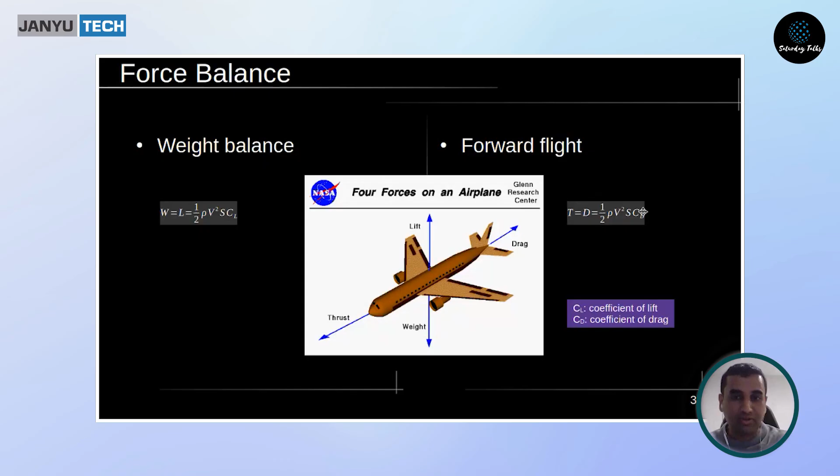Just bear in mind, CL and CD are going to make an appearance a fair bit as we go through the talk. I'm not able to change slides... No, there you go. All right.

Now that same force balance equation actually becomes a little more nuanced. I showed you an airplane flying straight and level. Now, instead of flying straight and level, if our airplane is climbing or descending, here's what happens. So I have an airplane that's climbing or descending, and this time, well, when you ask, what do you mean by climb?

Where is the airplane pointing? We have to be a little cautious. So the first thing we do is draw this reference line. Think of the fuselage as a perfect cylinder - this black reference line would be the central axis of that cylinder.

It's called the fuselage reference line, or FRL for short. The FRL is inclined to the local horizon, and the angle between the FRL and the horizon is called the pitch angle. The pitch angle is basically used to identify the component of gravity along that line, but it's irrelevant to our discussion today, so we won't worry about it.

But we'll worry about two specific terms that add up to the pitch angle. It's understandable that the airplane's velocity vector, or flight path, shown here with this black arrow, need not be perfectly aligned with the FRL. Sometimes the plane's nose can be above the velocity or sometimes below. The angle between the velocity vector and the FRL is known as the angle of attack, denoted by alpha.

And that second component, which tells you the angle at which the airplane is climbing or descending, measured by the angle between the flight path and the horizon, is denoted by gamma and called the flight path angle. Now, as a matter of notation, lift and drag are defined along and perpendicular to the velocity vector, that is, the flight path. So lift is perpendicular to the flight path and drag is, by convention, along the flight path.

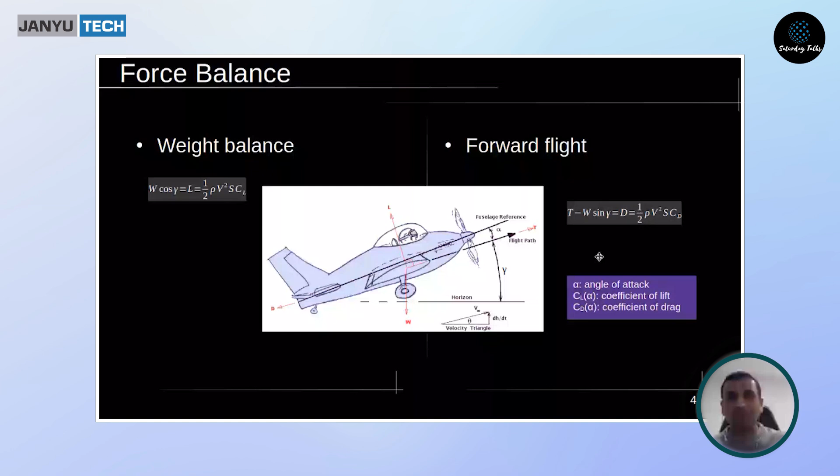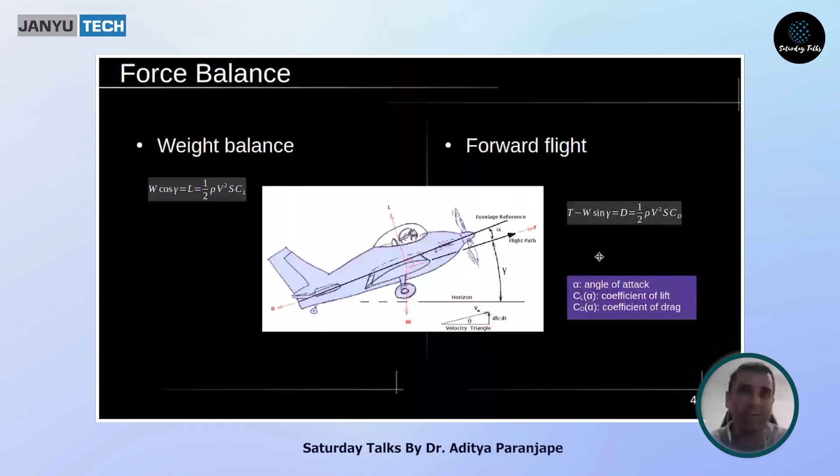Nothing else - and that's sort of obvious, because the aerodynamic forces do not depend on gravity. They really just depend on how fast the airplane is moving with respect to the ambient conditions. So whatever orientation the airplane has with respect to the oncoming wind is all that's going to dictate the forces. That intuition is captured here in these mathematical expressions.

So with that, let's understand what CL and CD, the two coefficients, look like as a function of alpha - and that's going to lead me to talk about a phenomenon known as stall. It turns out that the coefficient of lift, CL, as a function of alpha, has a very distinct bound.

If I were to plot CL versus alpha, I've shown it in green. It initially increases linearly - this reference value need not be 0, it could be some other value, depending on the precise shape of the wing. And then after a point, it flattens out. When it flattens out, you get a condition known as stall.

Now, what's happening physically is that on one side of stall, where the lift increases linearly with alpha, if you look at this picture, you'll see the flow around an airfoil - this is taken from a wind tunnel. You see the flow actually smoothly tracks the profile of the airfoil, so that flow is called attached flow.

And that attached flow is what enables this wing to produce a good deal of lift with the penalty of very little drag. To give you an idea, the ratio between lift and drag is typically as high as, for a pure wing not counting the fuselage, 30 or 40. When you add a fuselage, that ratio obviously comes down.

Now, the reason this stall happens is because the flow struggles to stay attached as this wing becomes more inclined with respect to the oncoming flow. And what you see on the right is another picture from a wind tunnel.

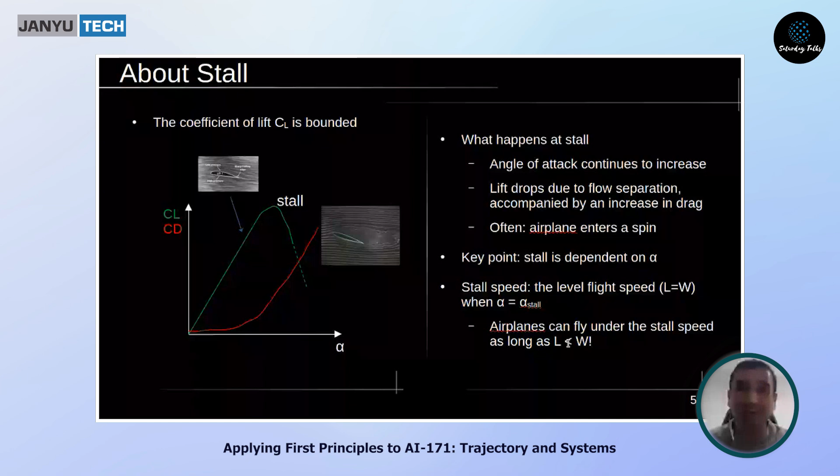The reason I brought this up here is because going back now to the Air India flight, I'll play the video for you later and show you why it was thought of as a stall. There was a feeling maybe that the airplane had stalled, and some of us on the other hand held firm saying that it's not a stall, because when an airplane stalls, the rate of descent is huge.

It's typically on the order of 4,000 to 5,000 feet per minute, sometimes even higher, whereas with Air India we saw a much lower descent rate. So we knew the airplane hadn't stalled. The speed can go down below stall, as long as the lift stays below the weight.

And when that happens, the airplane is no longer flying straight and level. It's actually performing a turn in the vertical plane. So its flight path angle is getting ever steeper, but it's still under control.

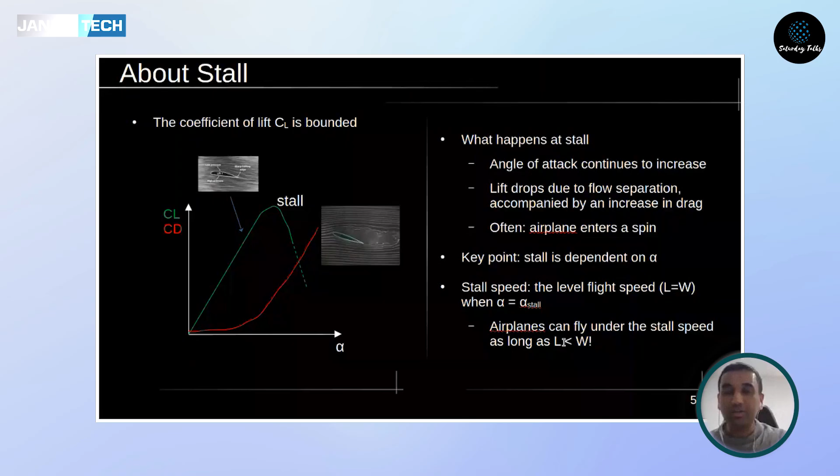If you now throw in an energy calculation, which is also fairly interesting - remember, we do know that the speed recorded was around 180 knots at 21 feet. 21 feet we can assume to be zero for the sake of argument.

Now, if you just decide to look at energy conservation, forget drag for just a minute, but you can compensate for it fairly easily. It tells you that the max altitude the airplane attains will depend on the speed. At this point, it is not known.

But if you use something like 170 knots, which is the value that was recorded at some point by FlightRadar 24, you get a max altitude of around 150 feet AGL. Numbers can vary, so that number could be as low as 120 if that 170 shifts to 172 or 173. It can go up slightly if that 170 drops down to 168. So that's the ballpark we are looking at, and we get very different estimates in there.

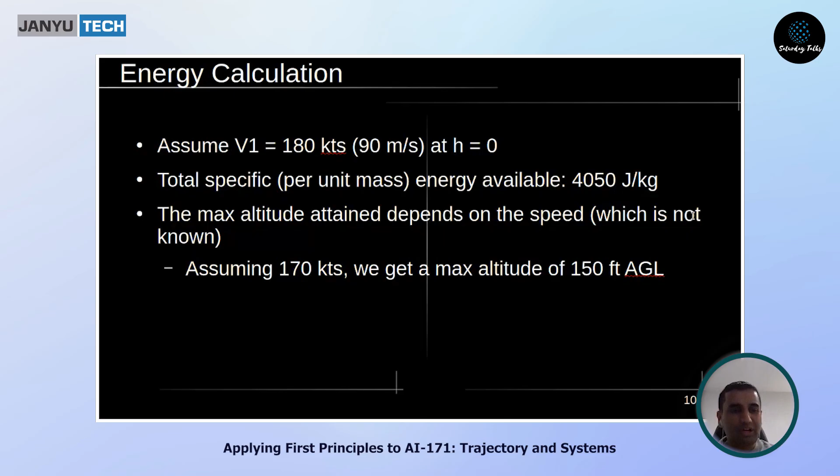So this is the first part of how you go about sanity checking the trajectory that you've got. The second thing some of us tried to do - so it was me, there was an Air India engineer, I won't name him here, but he's fully rated on the 787 - we just sat together and decided to do some estimates.

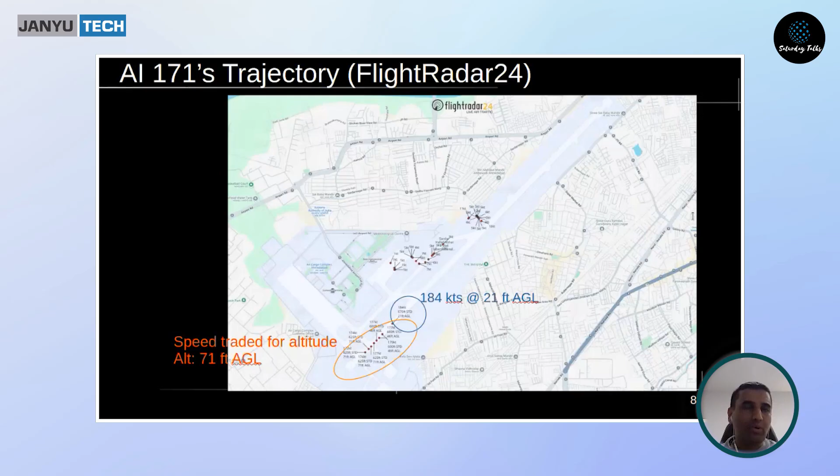And what we did was, if I may just go back a few slides, we coded out these equations. I was going to show you some plots, but I thought I'll show you the code itself directly. And if you want, we can even play around with it.

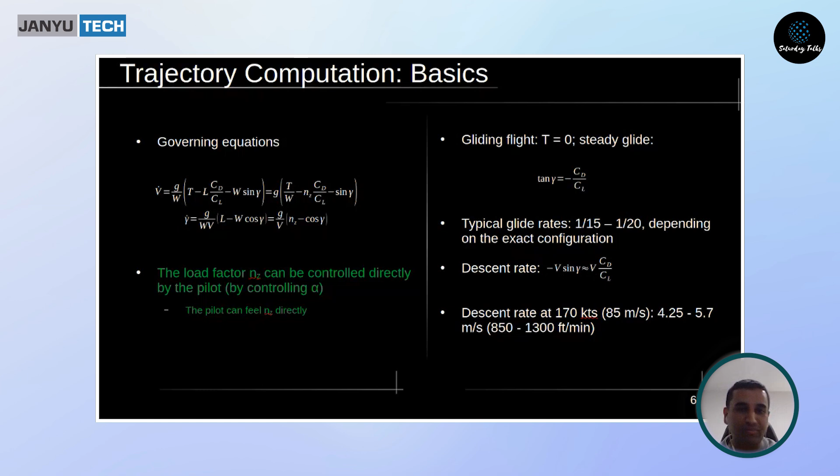Is anyone interested in playing around with the code now, or do you think it's not of much interest? Sorry, I can't see anyone. So if you're interested, just speak up. If you think it's not of interest, we can move on. But you need to tell me something. We'll run the codes towards the last part, sir. Yeah, sure, you want to do that? Okay, so towards the end, I'll show you then how the code works.

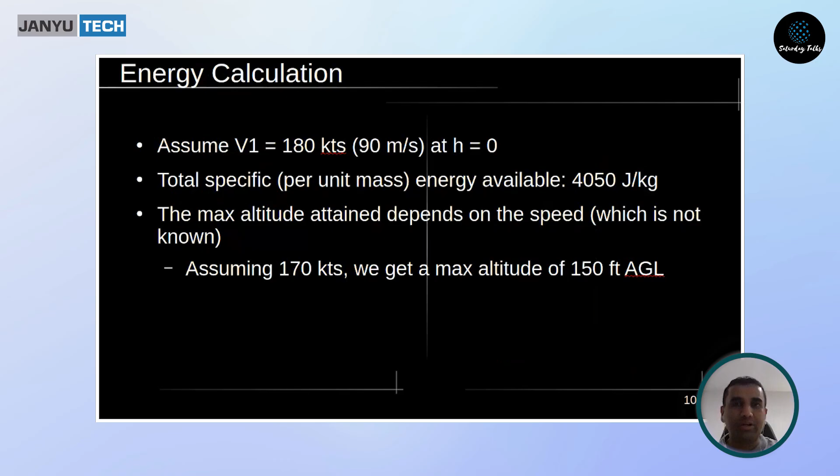The point about the code is not the code itself, but what I want to point out is the difficulty involved in modeling this. So you remember I told you earlier about the coefficient of lift having to be delicately managed - that's something I pointed out. And that point will become amply clear, and you'll actually see what CL can do, what kind of policies you can use, and so on.

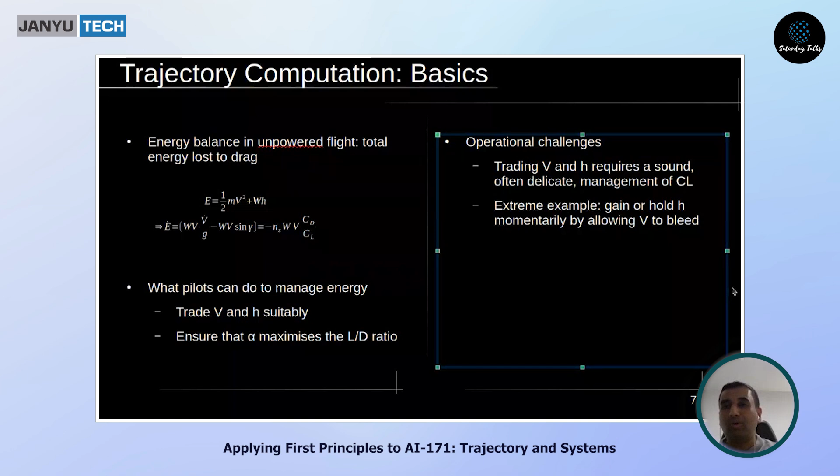All right, so let me just stop there for one moment. Does anybody have any questions about the trajectory modeling we've done so far? Yeah, I have a question, Dr. Paranjape - you were telling about the descent in a gliding mode, after it reaches height, the flight descended in gliding mode. But what if, I'm speculating, because the angle of attack was above a particular value, the drag would have been much higher, and it would not have been a gliding, right? It would have been a downward force, which would have forced it down more forcefully than a gliding.

Oh no, not at all. No, actually the plane was in gliding mode. That's one thing we were trying to determine - the exact point where the thrust was lost, based on trajectory estimates. But the plane was pretty much in gliding mode from just a few feet above the ground.

Now in airplanes of this sort, regardless of the angle of attack, the drag is high. But even when the drag is high, the lift is high as well, unless your angle of attack shoots up. And in these airplanes, two things happen. First off, pilots are trained not to get the angle of attack above a certain critical value, which is a few degrees below stall. And these airplanes have a very well-developed envelope protection system, or EPS for short, which prevents the angle of attack from exceeding the stall value. So if stall is not exceeded, your CL by CD ratio, or lift to drag ratio, will stay at a reasonably high value. It may not be the optimum value of whatever 19 or 20, but it will not plunge down to stall kind of values either.

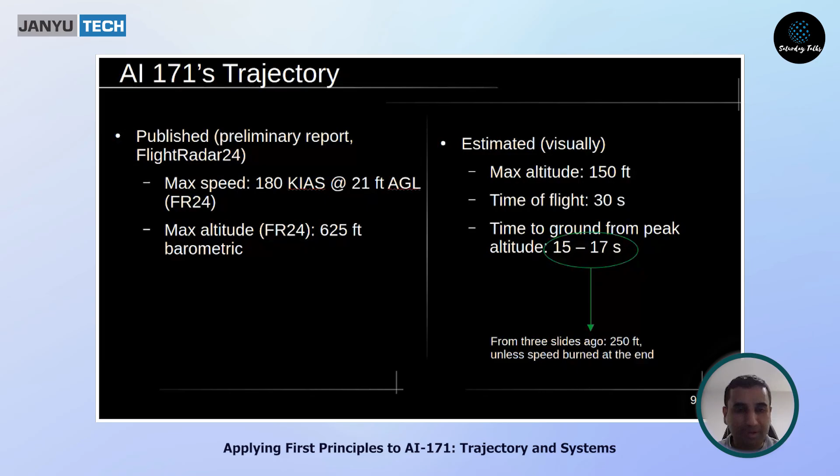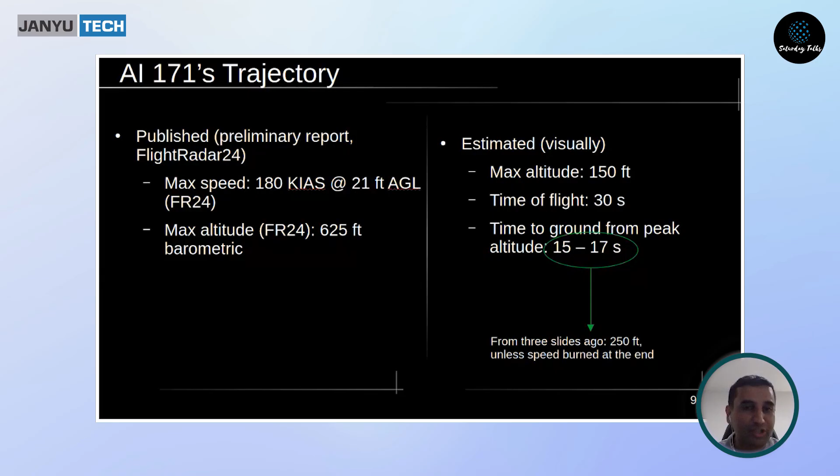So what happened with Air India 171 specifically was one of the recordings was taken by a boy in a settlement right beyond the airport. And in fact, if you were to look at that video, you can clearly see the airplane just gliding down - that was one of the first signs that this wasn't a stall. Let me just see if I can play that video very quickly for you, so I'll be able to show you what I mean by that. Notice the airplane climbing up.

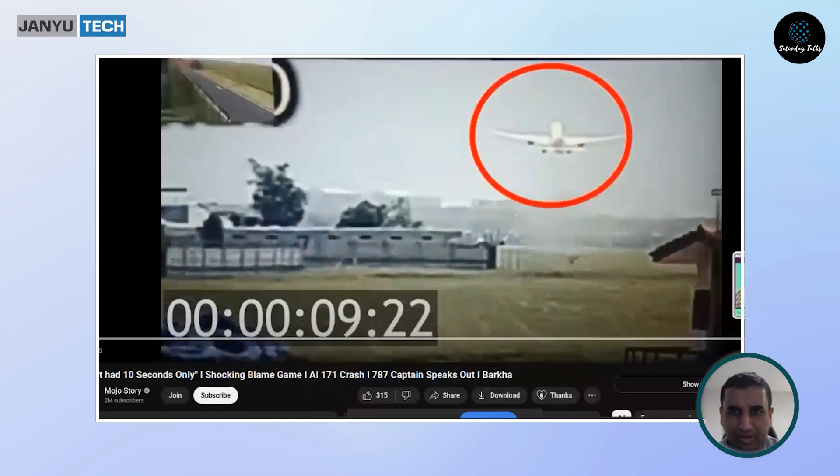It flattens out around this time. So around 14 seconds, flat, almost flat, and it starts descending here.

Now, as you watch this descent, you'll notice the airplane wings are by and large level. It's very difficult to tell, of course, if the rudder or aileron were used from this distance, but we know from other videos that they were rarely used.

This kind of profile is not consistent with a fall, because if the airplane were to start falling, that would only be because of stall. And when stalls happen, the airplane will not fly with this kind of wings-level configuration at all. It's almost impossible for the airplane to do that. So once a stall happens, it can be very aggressive.

What I was going to talk to you about was the engine control. Now here is where, I have to admit, I'm not an expert. This is one place where I've sort of got a lot of things from engineers, though I knew a little bit about it myself as well.

One question we were generally trying to understand, and probably others asked too for various reasons, is how do the engines fail in the first place? Never mind how do two engines fail. Some of you may have already read or heard about it in the press, or followed up with other sources, but I thought I should tell you a little bit about what happens in general.

If you look at an engine, this is a cutout of the GE engine used on the 787. There are a few parts to highlight. First is the fan, a low pressure fan, and the flow behind it splits into two channels. One channel goes through without further processing, called the bypass, going to the outer duct - relatively cool air. Some air enters the area with these rotors, known as the core.

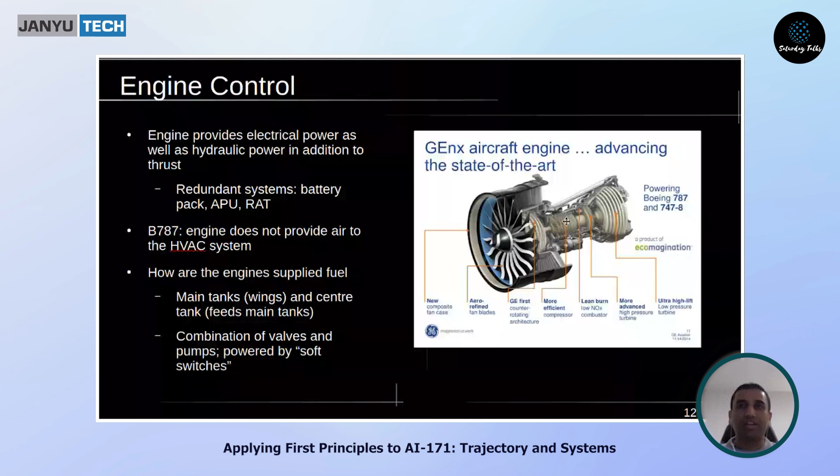So these are the 3 phenomena that can go wrong. So the question is, okay, so outside of these 3, what else can go wrong with the airplane? So again, we're not speculating, we're just pointing out what can go wrong pretty much explicitly. So if you look at these engines, they are powered by a pretty intricate fuel supply system.

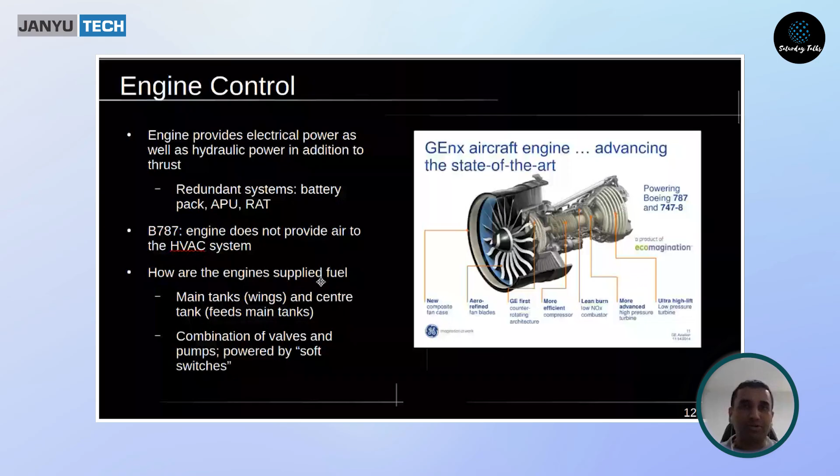The primary supply comes from tanks that are located in the wing. So each engine gets fuel from the tank in its respective wing. In addition, you have a center fuel tank, and all these tanks are connected by a fairly complex set of pumps and valves. So I just asked ChatGPT to give me a picture that I could show. It gave me a text image, which was really pretty neat, I thought. But here's loosely what's going on.

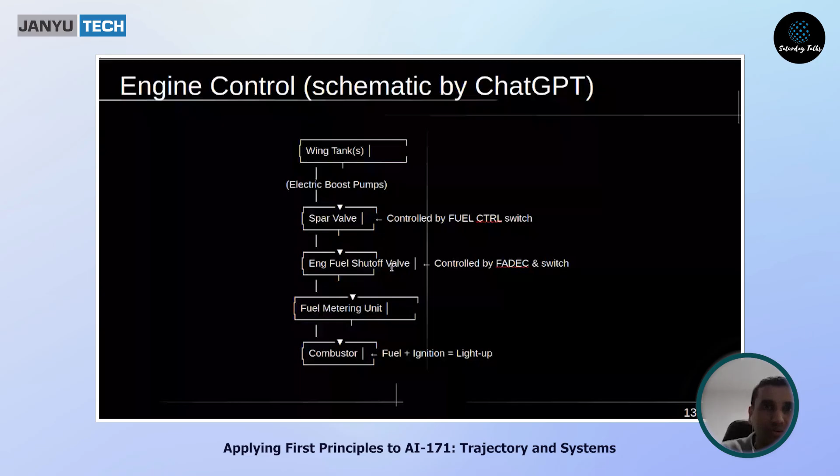So let's say you have a wing tank. You have boost pumps that go to one valve. From here on, I honestly don't know what the spar valve is, other than the fact that it's located in the wing spar. From there on, you have this fuel shutoff valve called FSOV. It's called the engine fuel shutoff valve. This is one of the more critical valves in the system. And from there on, it enters the combustion chamber.

Now you notice the control for both the spar valve and the FSOV come from the switch that's located in the cockpit. But the FSOV in addition is also controlled by the FADEC, which is the full authority digital engine control system. And while the FADEC responds to signals from within the engine, see, the idea is you don't want the primary flight control system to bother about what's going on in the engine. So there's a problem with the EPR, the engine pressure ratio, the FADEC can respond to it without bothering the primary flight control logic.

But if something relates to the motion of the airplane, for example, the airplane's altitude, the airplane speed, or the thrust requirement that's commanded by the pilot, at that point, the FADEC gets inputs from the primary flight control law. So if anything has to fail here, it has to be either because of the switch, or because of the FADEC, or because of the flight control law that feeds into it. Now, all of these are generally very well certified, but historically, we do know problems have occurred. And especially the problem is, some of the switches that exist in this system are not mechanical, they're soft switches.

That is, they exist in the software. So that's what's actually contributing to a great extent to the uncertainty in AI-171. But anyway, that's the technical side of it. Hopefully that picture will become clear once the final report is out.

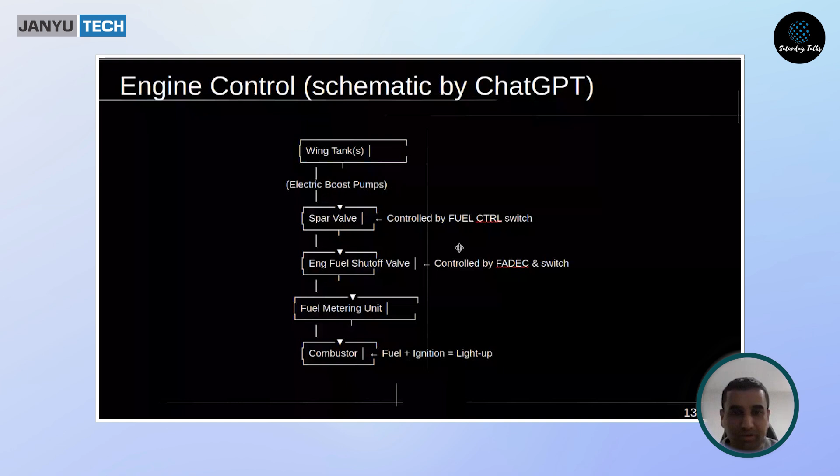So let me stop there. The engines thing, we can kind of go on, and at some point I'm going to hit the saturation of whatever I know, which is not a lot. I'm not a specialist in engines, but I've learned a fair bit thanks to talking to some very well-informed people over the past couple of months.

Sir, a small question. This engine fuel shut-off valve you mentioned is controlled by FADEC and a switch. Is it that FADEC controls the switch, or that FADEC and the switch both can control it independently? It's an AND logic. So if they are both one, the valve is on. If either of them shuts it down, it can shut down.

Oh, okay. Because there were some conspiracy theories where somebody has... I mean, it's remotely possible to switch off. Oh no, sir, no, nothing of that sort. There is nothing of that sort. So these are completely... it's an AND logic in there.

But going a step further, the beauty of the design is that these engines are actually capable of sucking in fuel even without the pumps in the system, at least to some fuel flow rate that can keep the engines running. It's remarkable, I wasn't aware of this. I was talking to an engineer and asked, if the valves are off, are we sure the fuel's off? He said that's not true, because in an engine, in addition to all the moving parts, you have a massive distribution of pressure across the engine. When you have areas of sufficiently low pressure, you can suck fuel from there if you have sufficiently high speed flows, since that's where the static pressure drops. If you connect that to the fuel tank, you can actually suck a little bit of fuel through that suction action directly. That action may not be enough to keep the engine running at its full mass flow requirement, but it might be enough to just keep it idling. An idling engine is way better than a shut-down engine, just because of its aerodynamic profile, and an idling engine can be powered up if you go through the recovery procedures. But an engine that's shut down has to be restarted, which is a very expensive operation energy-wise.